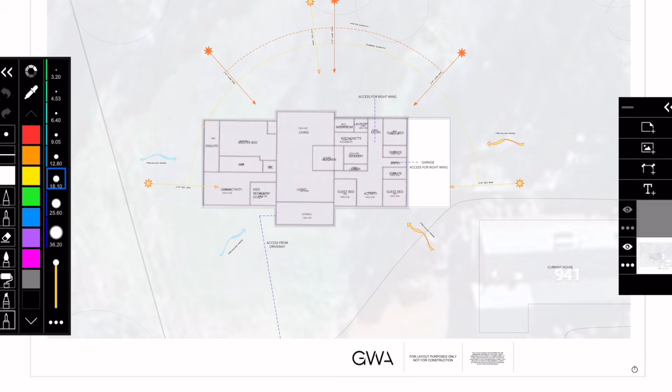So here we are, this is our site in Western Australia, in the Outback. Our client's property is, you can see the client boundary here, and it's just a vast property, so we won't draw any more, but that's probably all you need to know. Their existing property is over here at that corner, and the driveway comes in along this line, so your cars can drive in there.

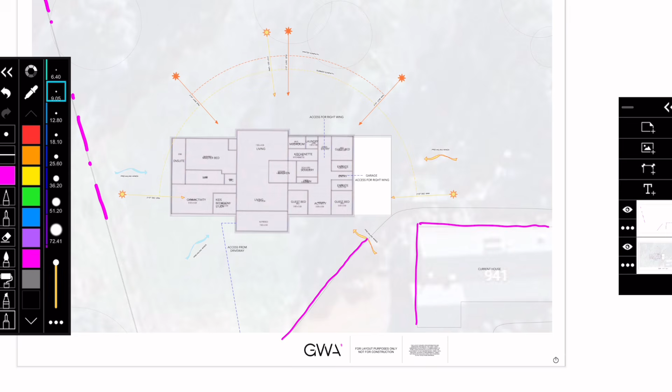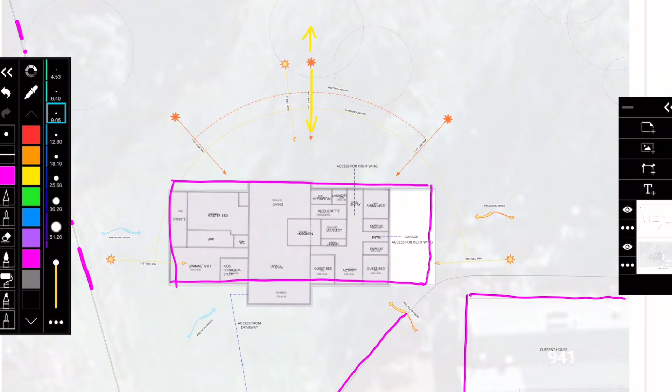North is up the page, so we're getting lovely orientation coming in there. Our clients had suggested that the house may be laid out somewhere here, and they also included an area diagram of the types of rooms they wanted included, which is helpful. So I'll just have a look at the pictures here.

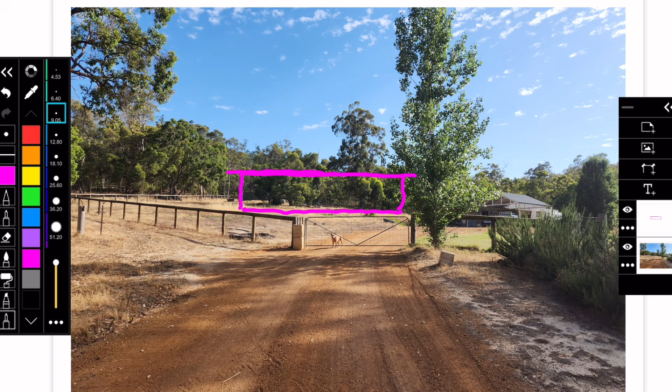So this is just a picture of the entry to the site. Our client was envisaging then that the new house would be somewhere in this vicinity, I think - a farmhouse style home. Excuse the violent colour, but somewhere in that location, and their existing house is over there in the back.

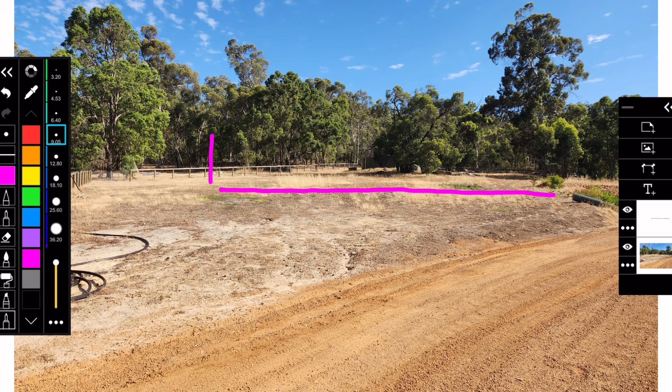And just translating that to this image, I think the new house will be located somewhere in this kind of vicinity, looking out onto the bush and out in that northern direction, which I think would be really nice, along the driveway there - a nice driveway leading to the other house as well.

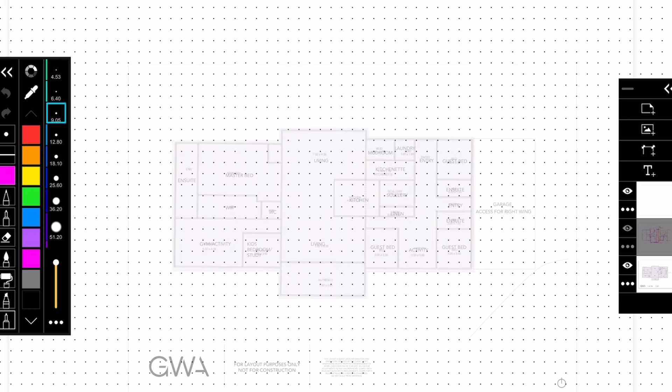So let's just get into the actual planning now. I've just drawn an outline here approximating a sort of farmhouse style home. I think what we'll do is start at the garaging end - let's just get that done, because I think the cars will come around and enter. It's a bit off the page, but they'll enter this way.

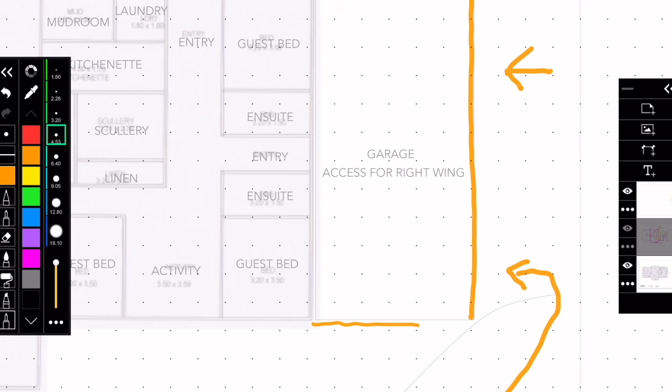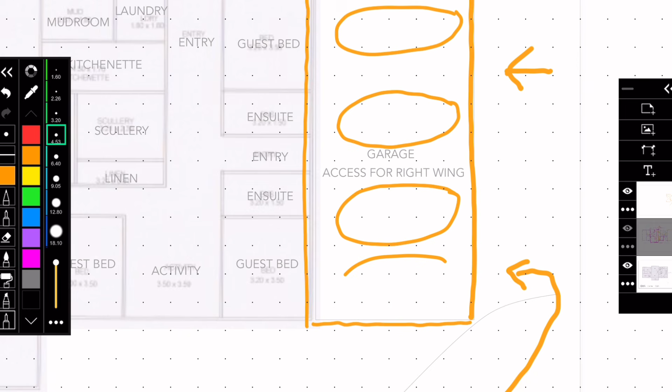So we'll have a 6 metre depth on that garage. Let's just show that - 1, 2, 3, 4, 5, 6, 7, 8, 9, 10, 11, 12. So that's a 12 metre long garage, which should fit 4 cars, and a 6 metre deep garage. So I'm envisaging 4 cars in there.

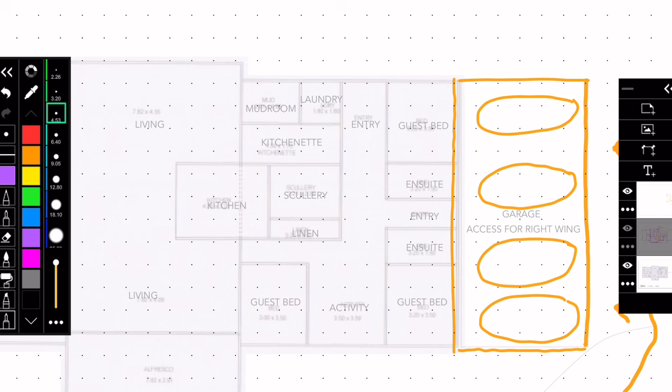And then from there we would need access into the house. Our clients had asked that the right-hand wing be the B&B, Pete. Mm-hmm. So basically it's small format rooms - we're looking for 3 bedrooms, 2 with ensuites and 1 bathroom, and probably some sort of living room. So should we just lay that out?

Yep, so 1, 2, 3, 4. Maybe 1, 2, 3, 4. Should we put the bedrooms on the north side, potentially? 1, 2, 3, 4. If they're going to have an ensuite, I guess they'll need to be a bit longer on this side. We could always flip it later if we think. What do you think, Pete? Yeah, I think that's good.

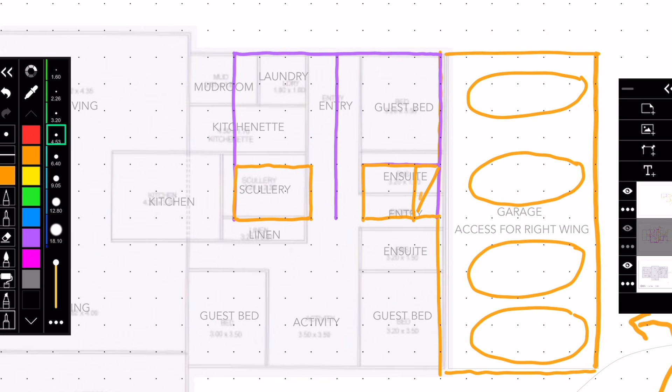I think it makes sense to have the bigger rooms on the north side when it comes to the master suite as well, to take advantage of that northern orientation there - they'd be lovely rooms. Then also what that maybe does is it moves the corridor back a little bit so that you get better capacity on the north side for the better rooms all through the plan.

Then maybe what we'll do is - should we divide up this other side? Yeah, 1, 2, 3, 4 into another bedroom, maybe. And I think we might need a bit more space on this side than the client's shown, because there are some additional amenities - the secondary living room. Okay, so should we put that in? I'm drawing massive again, sorry, I'll tone that down a bit.

So, bedroom. Then should we make a living room on the southern side here? Yeah, I think so. How big do you want to give that? Like maybe 5, maybe?

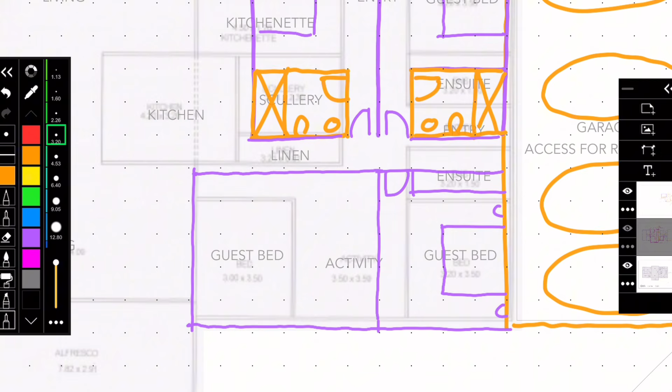Now we need a decent bathroom. Is it better to pull the bathroom back into here? I think we just need to make this right wing significantly longer and bigger because we'll need it. So should we add another 4 metres?

Yeah, because we need to include an entry, a laundry, a guest WC, and a large shared bathroom. I think the large shared bathroom should be on this side? Sure, just for argument's sake, we can have a nice bathroom with a bath and all of that.

And we need the entry. Do you think that needs to be on the northern side? Maybe the living room's there, the entry here, and a bathroom there, and then the laundry and shared bathroom for the guests of the main house.

Let's just draw it out. So you want a bathroom here, and then entry here. It's the long side, so it's less efficient, but let's just work it out. You don't want the laundry there? Well, I'm trying to avoid having to come into the guest area for doing the laundry, so laundry here?

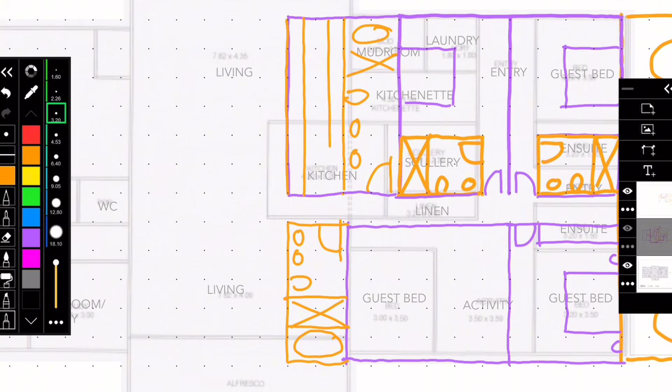We'll probably need that bathroom anyway for the guests, plus a laundry. Okay, have the laundry in there. Then where's the entry? Well, I was thinking the laundry should be on this side. There also needs to be a mudroom. It's getting very long, this wing, I'm a bit uncomfortable.

Okay, so we're adding another 2 metres throughout, to get your entry on this side and some utility on this side. Maybe that's the laundry. But you've got a laundry - well, they want a mudroom and a laundry. Look, it's probably a bit excessive, but we'll come back round. Okay, so we've got at least everything we need there.

Shall we fill out this a bit as a living room? Let's just make that a bit more clear, that that's a living room with a simple kitchenette. Maybe we have the kitchenette on the utility side, and then it's a living room, so we have sort of lounges.

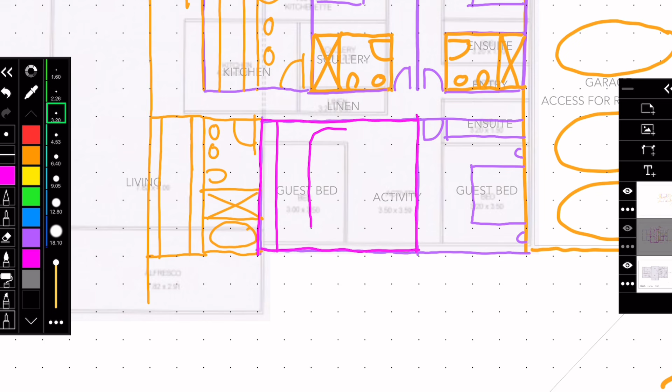Or would you have it facing the other way for the TV, like more like this, a little sort of space like that. Sure, and it can be open or closed. I'm not sure whether they want it open to the hallway or not.

All right, so let's just do the check, we've got the things we need, let's just check we've got everything. Do you want to walk through from here? So we need 3 guest bedrooms, 2 with ensuite.

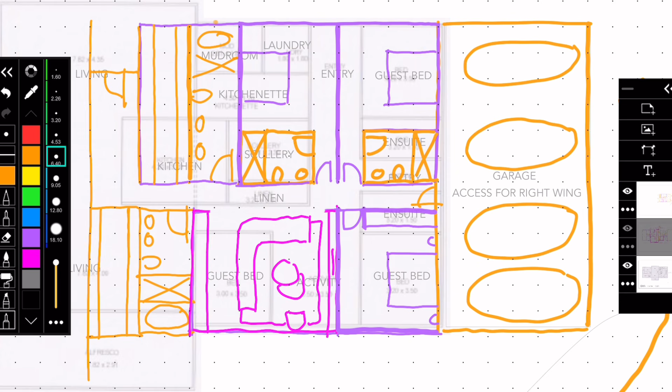Check. 1 bathroom for the B&B, the entry, a living activity room for guests with a kitchenette, a 2 metre wide wraparound veranda. Yep, let's just add that on, so imagine all the way around there's a 2 metre veranda on this side.

Then there are a couple of elements moving into the middle wing zone: a WC for guests, a mudroom, and a laundry. So laundry, mudroom, and the guests - that's sort of laundry, and obviously a bathroom.

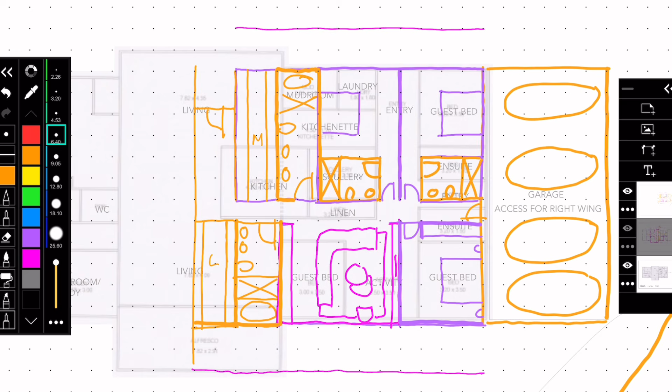Look, I don't mind the idea that there's a pretty robust utility core right here at the transition between the B&B wing and the living room wing, because that way the people who live there don't have to go into the Airbnb or B&B wing to interfere. It's quite good, so I think in principle that works quite well, and we'll probably be able to condense it later.

Okay, move into the middle wing. So they want a kitchen, a scullery, a dining room, 2 living rooms. Okay, so okay.

I'm wondering if the kitchen could, if we delete the mudroom maybe and move it back, then maybe we could have the kitchen there. Anyway, we'll deal with that later. So let's envisage that we have the kitchen here, let's just start with that. Let's see, 1, 2, 3, 4.

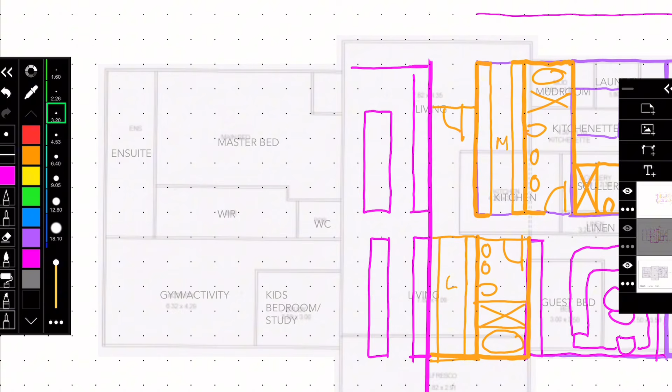Maybe we don't go long on that bit yet, so keep that on the same length. And there's a scullery maybe opposite, do you reckon? Yeah, maybe the scullery's over here, something like that, so it's across the hallway to access the scullery. Kitchen is quite nice and generous.

Then maybe we come into, maybe this is where it can expand out, and you need about 6 metres for the living room. So 1, 2, 3, 4, 5, 6. Something like that.

Maybe because we've got to fit two living rooms in here. Let's not forget.

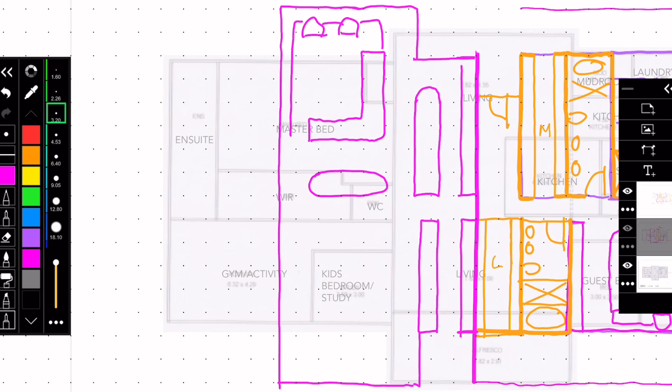So then maybe the dining room goes here, and the living room goes there, potentially. Is that stupid? No, makes sense. Let's see, just drawing it very quickly here. And then you could potentially have your second living room in this other direction, which would be nice because it gives a completely different vibe.

How would we do that? They also mentioned potentially a central fireplace. Yep, open to a double fireplace wall in the middle. Okay, well let's try it. I feel like you'd need another fireplace down here, but let's see. In this format, it might actually work quite well. It's nice to create some separation.

Where's the TV? Pete's the TV specialist, so where's the TV, Pete? Would you have a TV on that wall maybe? TV's on this side, yes. And then you have room for really lovely, generous lounges all around.

Something like that. We can refine the size of the space afterwards, but that's a glorious living room then. And it could be more or less enclosed depending on what the client's wishes were. I think that looks pretty good. What do you think, Pete?

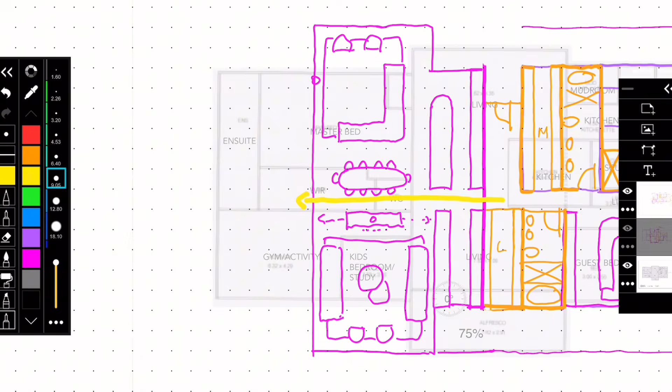And now we have the bedroom wing. So I guess this is a master suite. Left hand side, we've got a master bed, a kid's bedroom slash study, and a gym.

Okay, so say we go one, two, three, four. That could be the kids' room, maybe, taking advantage of the lovely north aspect. And similarly, they'll need an ensuite I guess, or it could function as a separate bathroom. But we'll put a bathroom there.

I'll do it like this just in case they would prefer that not to be an ensuite. It could be either an ensuite or not. I'll do it not as an ensuite, just for now. And then that's the kids' bedroom there. Lovely aspect to the north.

Then to the south we can have another room. Is that the gym? Yep. Might be a bit bigger maybe, but we'll see. I'll just draw it as a standard room size for the moment.

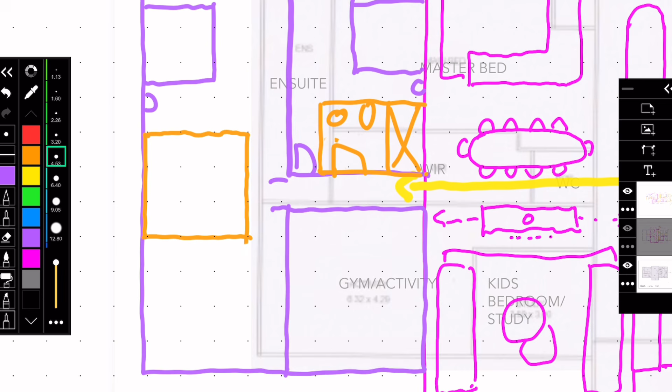Would you even... Yeah, so then they have options. The thing I like about this type of plan is that they have a very generous bedroom here, with a large wall for bed placement. Could be a super king or whatever they require. Then there's room for the bathroom, so how would we lay that out?

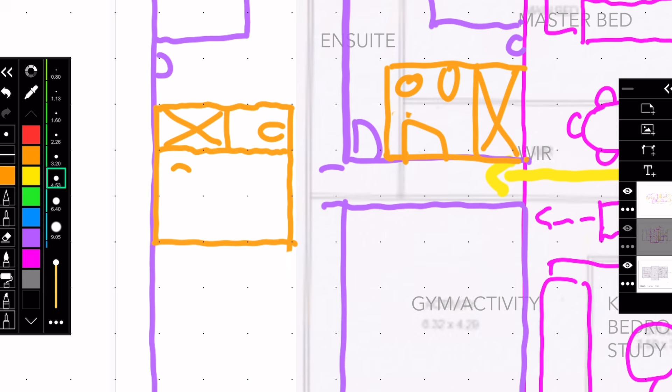We could have a bathroom like this. What would you do? Bath over here potentially, and then something like that. I mean, for argument's sake, there'd be a few options.

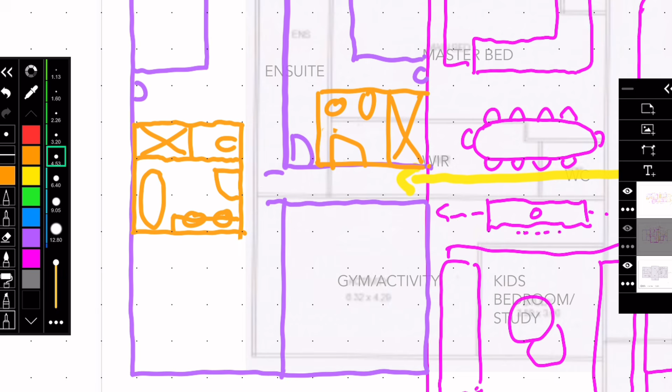And then the client would have the option to have an extra room here. Is there enough space to run a robe? Yeah, I'd really like to do that too. So we could rejig the dimensions a little bit to include significant robe all along here, and also they have an extra room they could use for whatever they want: a glorious walk-in robe, a study, a yoga room, or a private lounge for themselves.

So I think that's quite nice in principle, and it'd be interesting to talk with the client about what they prefer. And then I guess there's the gym. I'm not sure if they would find that big enough, but they could also have glass doors along this side, maybe, giving them the option to utilise some of that space for a bigger gym, if they wanted a trade-off.

So for the moment, that's still a very decent size room at 5 metres by 4 metres. But if they wanted more, we could definitely arrange that, maybe with some glass doors along here. Is that a bit excessive?

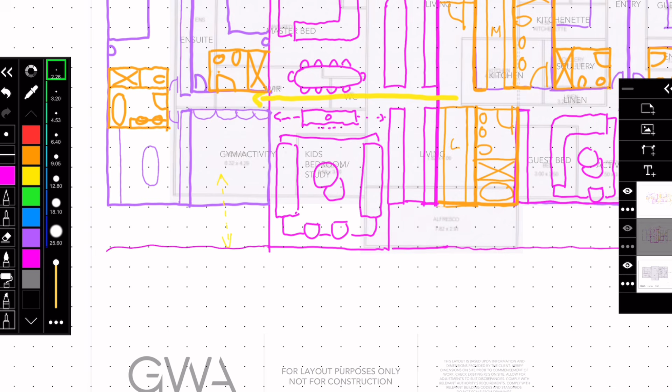The idea would be to create some openness so that in the corridor you can feel some of that benefit of the aspect and the view out that window. I guess the veranda would continue all the way around. I'm running out of space on the page, but they'd have a wraparound veranda, which is a lovely way to live in Western Australia, I think, in that harsh environment. Beautiful.

And so that's sort of looking pretty good. Create some larger alfresco areas. Definitely, that's a really good point. Where would we be putting those?

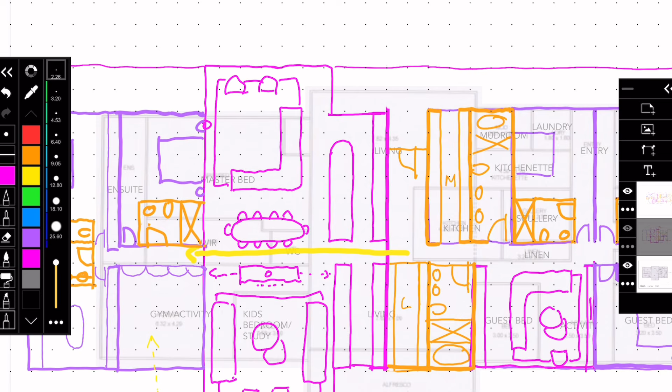Because we see a lot of designs where people plonk the alfresco right here, and thereby ruin the main living area. What would we be suggesting in this case, do you reckon, Pete?

It's tricky. Maybe what you do is move the entry back, and then you can have an alfresco zone here. Just thinking aloud, maybe what I'd actually suggest is that we shift the entry back to here, say.

Such that, say you had your entry point there, and then other utility in there, and the kitchen is somewhat utility as well. Then maybe you would create the opportunity to have your alfresco to the side of the living. Would you consider that, Pete? Potentially, or is that just bizarre?

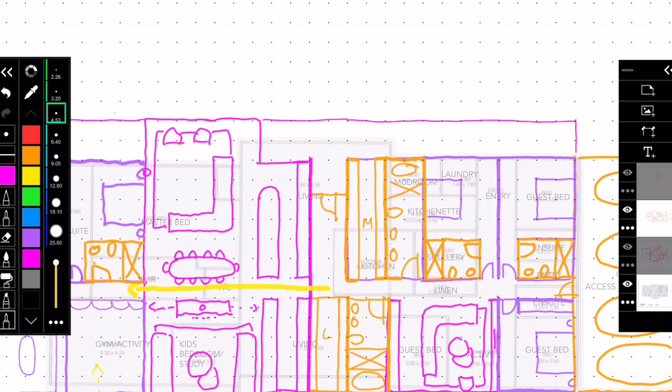So maybe what we do instead is we bring a portion out. How? 1, 2, 3, 4. Is that one thing to consider? There's so much space here, you can kind of create, do what you want.

Like the zone a little bit removed from the house. You create a large alfresco area out from the house. Possibly.

I guess what we're just trying to avoid is creating visual clutter, because our best orientation is the north, coming in like that. So the challenge is you have potentially an alfresco zone blocking the best aspect to your primary living areas, which would be a real shame.

So maybe one option we could suggest is that it's attached to the house, but it has a flexible roof. The way we do that is we'd say, okay, it is attached to the house, but it's a structure that has some frames, possibly something like that, and you have a flexible roof like a Markilux awning or something that goes in and out along those frames.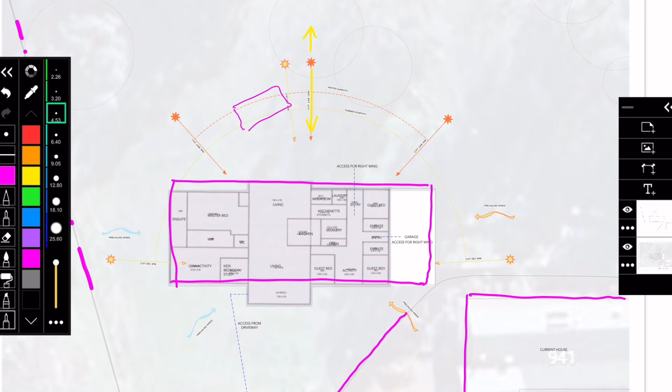And I guess the other option would be you'd disconnect it from the house and propose a kind of gazebo or something, maybe sits over here or something like that. So that's one way of looking at it.

I guess, is there any other option you'd want to try in this sort of situation, regarding the alfresco? No, I guess sometimes we feel that the central living room has challenges, so I was wondering if it would be worth trying an option where we consolidate the bedroom wings a bit more, but it's a bit tricky with the B&B requirement. I feel like the brief is quite specific in the requirements for the wings.

I suppose one thing we could try an option for is the arrangement of the living space. I guess one thing that is not ideal, let's try something in here.

This option is that the big dining room is a bit buried in the plan, so it doesn't enjoy the best of the plan, does it? I wonder if there's an option where we move the kitchen, rotated such that the dining and living both take advantage of the northern aspect.

I love that concept, so why don't we just try something. I imagine then we'd need this to be a bit wider, and we might consider rotating the kitchen around to sit in this. I think it's wide and deep enough, isn't it?

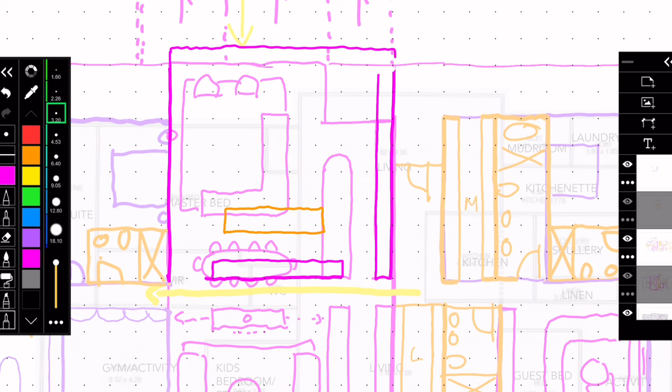So should we do a proper dining table, not just a banquette? Let's see if it works properly. We could always get rid of that there.

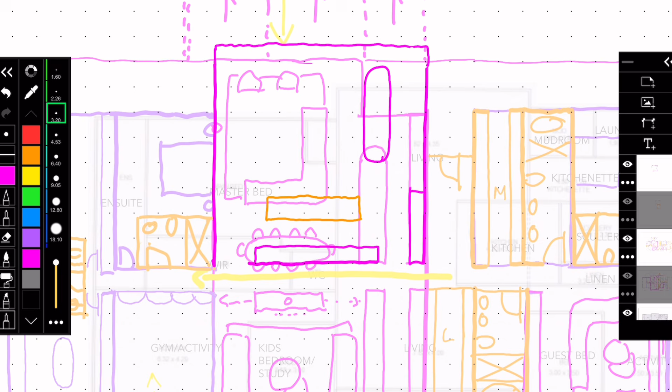I'm just wondering where the scullery goes. Well, it's quite wide, so would you make it... it might make sense to make the scullery sort of there. Let's try it.

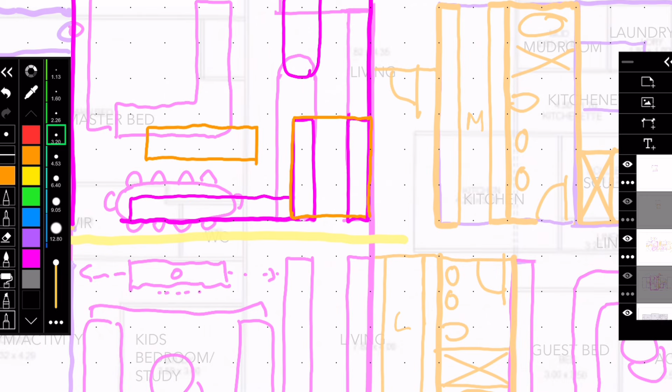All right, so we go that way. Something like that - you might have your scullery in there.

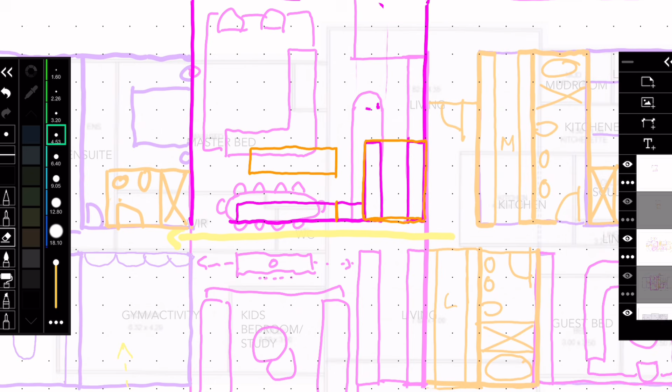Probably could move that table over a bit. Drawing things massive again. Something like that, and then we'd have this living area in that location. I've drawn things very generous, but we get the idea. It's a big house.

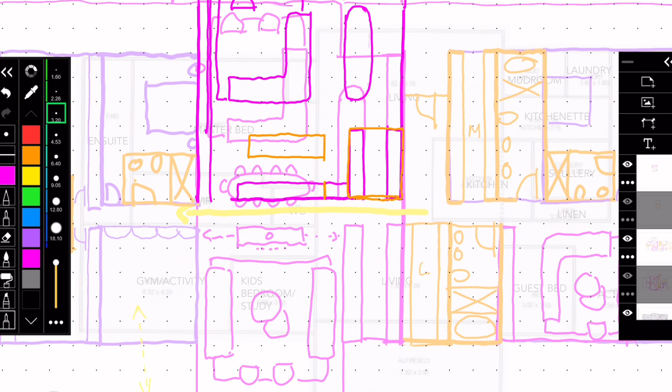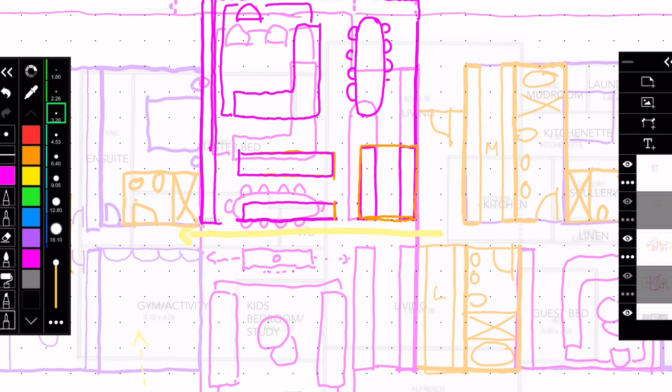So we might change that around - put the kitchen in that orientation, so we've turned that 90 degrees effectively, that whole room. It's a big table, but we get the idea.

I think that's looking nice, and then let's see what happens. So then the living room over here is still intact, I guess. You might have a bit more enclosure there potentially.

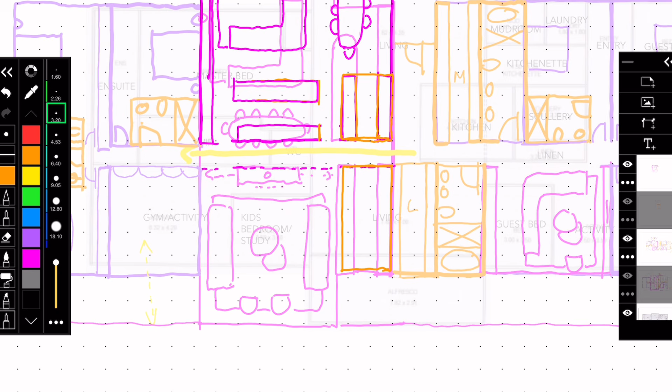This option may mean actually that we can consolidate some utility in there, like maybe that means then that we can sort of effectively shorten this zone, so we can consolidate that. We have, maybe that's the laundry there, that's the pantry.

You've still got lots of tall utility for the actual kitchen, which is great - it really makes me happy. You've got lots of nice tall utility along there, a great work zone, a 4-metre island. So that actually looks really good.

And maybe also we can sort of bring this over a bit. Maybe that doesn't even need to pop out on that side, but we can see what we think.

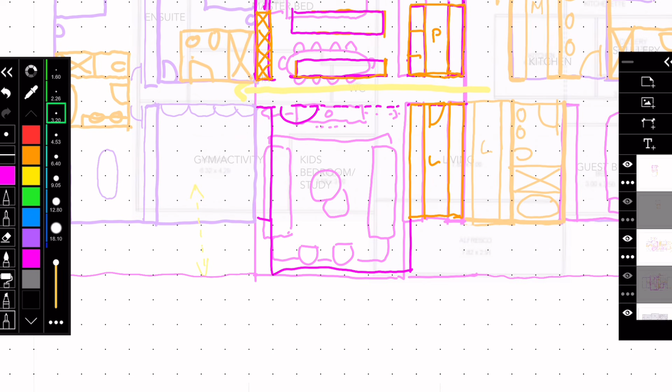Do we still want the fireplace, or would you do like glass doors? Either or - we could maybe do the fireplace, or... I guess what I like about having sort of something, whether it's glazed doors there or a fireplace, is that you're creating a kind of private-ish, separated path through. It's too big to be totally open, and sometimes it gets cold.

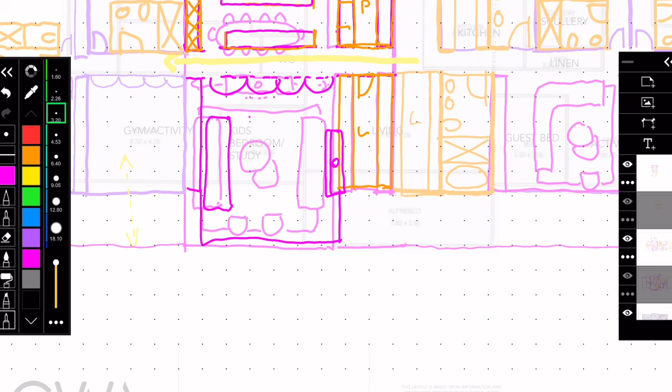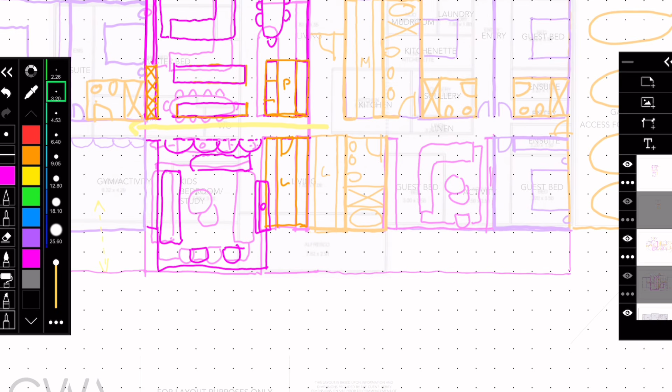Why don't we do this option with the fireplace sort of more like in that location, and just a different sort of layout to that room, just a bit more focused on that fireplace over there. So I think that's actually quite interesting as an option, and we'd probably go back and consolidate the wing on the right-hand side, which I think can happen probably in both options anyway, in the refinement. But yeah, I think that's quite interesting, and I'd be very interested to hear what you guys think.